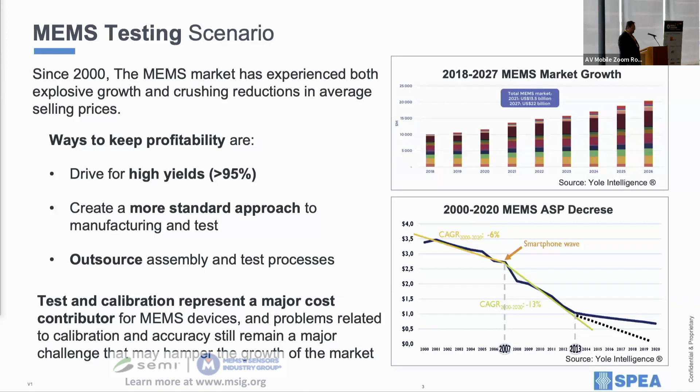We have also seen another aspect, which is the outsourcing of the testing solution. Outsourcing, because especially in the last 10 or so years, it has become very evident that keeping test capability in-house for IDMs has become very costly and inefficient.

The other challenge we have with testing for MEMS products is that there is a wide variety of MEMS devices. Those typically require application-dependent solutions for testing, which of course adds to the mix and complexity of the problem. This creates inefficiency, especially on the cost side, and affects scalability as we look forward to mass production—as we pass the stage of engineering and design and look toward mass production. This becomes a huge problem that needs to be solved if we want to keep the cost of testing down.

So how did SPEA approach the problem? We approached it with what we call the test cell. In particular here, I'm going to talk about the test cell value. The test cell is a composition of different elements.

The first one is the tester. The tester is the unit used to provide electrical stimulation for the MEMS—whether it's a pressure sensor, inertial sensor, it doesn't matter—you need some electrical stimulation for the interface. We designed a tester that can be used for any type of MEMS on the market, which is why we call this solution standard—it never has to change.

The second portion of the test cell is the pick and place. If you think about passing the stage of engineering and starting to approach mass production, you need a way to test multiple devices in parallel at the same time.

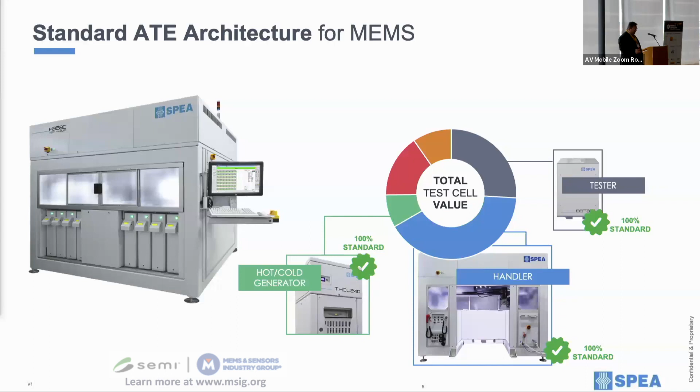There are two things that are not standard and are basically application dependent. The first one is the stimuli. The one you see on the top, depending on if you have a pressure sensor to be tested, an inertial sensor, a magnetic sensor, depending on the nature of the sensor, this unit has to be application dependent. And then the second are the sockets, obviously, because the packaging with which these MEMS come is very different, and each one requires its own application, its own sockets. So with the exception of the two units I showed you on the top, everything else is standard.

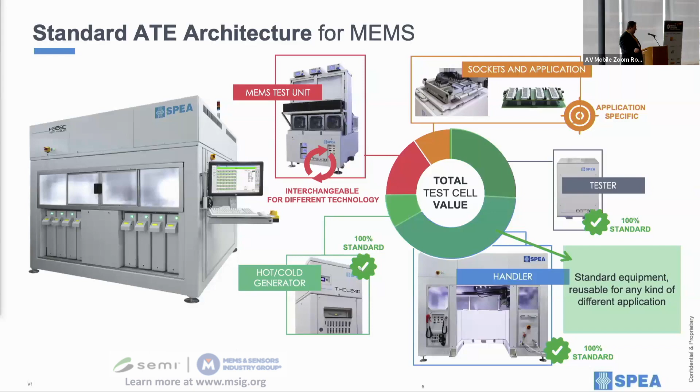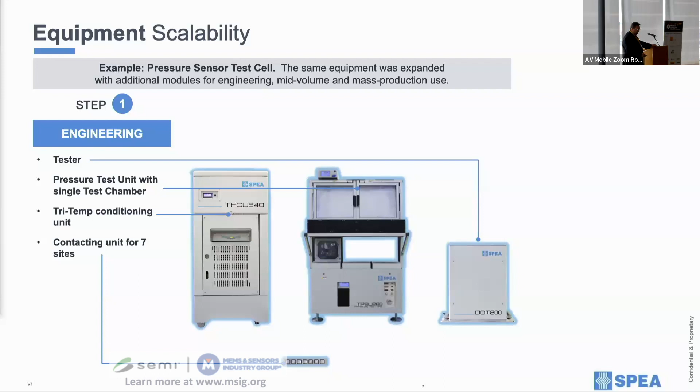So the design we chose for this kind of stimuli is such that the integration into our equipment becomes very simple. So, for example, if we think about the first stage of MEMS development, where you don't have a huge amount of volume to be tested, but you have the need to test the components, all you need out of the test cell I described before is the tester, and the thermal conditioning unit, if you need to test over temperature. And then, of course, you need the stimuli. Now, the stimuli I'm showing here is exactly the same stimuli that tomorrow will fit into the pick-and-place handler, hence the scalability. So for engineering solutions, with a simple small investment, you can address the testing need for this kind of sensor.

Then when phase 2 comes, when your volume starts to pick up and you have the need to test more and more components, not quite yet at volume scale, but enough to require some sort of automation, you can wrap around the stimuli we had before, wrap around the pick and place handler, and introduce also the testing sockets. So now, instead of testing manually a few units at a time, 1, 2, 7, now you have the ability to test 49 of them at a time. The pick and place can pick 49 components at a time from the tray, move them into the sockets, test them all together, and then sort them out as they come out. So now the volume starts to pick up. But let's just say this is not enough and your volume increases even more.

That's when the third step comes. In this particular case, what you see represented here is an example of pressure sensor stimuli. In the previous slide, there was only one pressure chamber in the stimuli, but the stimuli can be equipped with 3 pressure chambers.

For example, if you have to perform tests on a pressure sensor at different temperatures and different pressure points, you can set each of the three chambers at a different temperature. The device can move from chamber 1 to chamber 2 to chamber 3, and be tested at different temperatures and pressure points. The characterization curve of the device can be extracted, and then you can calibrate your sensor before you ship to your customer. Now, in this case, you have 2 or 3 testing chambers.

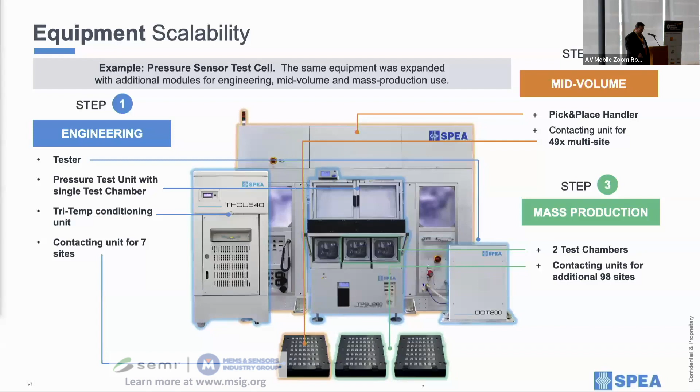The number of sites increases. It can be 49 by 1, 49 by 2, or 49 by 3, depending on the number of chambers that you have. So that's the concept of the scalability of the machine.

So I want to give you briefly 3 case studies: one for inertial sensor, one on the pressure sensor, and one on the magnetic sensor. Those are some insights on how the stimuli works, more than the pick and place or everything else.

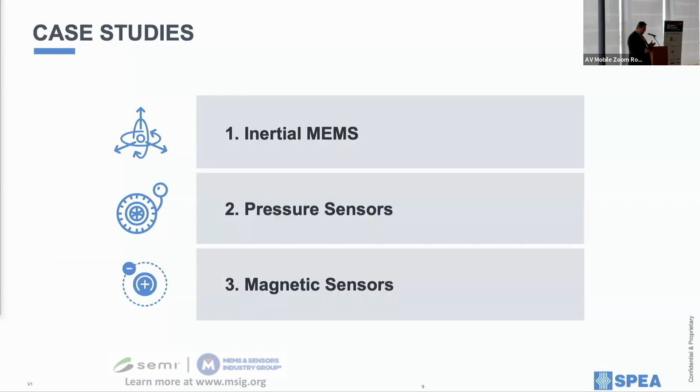With the 2 rate tables, we can reach a parallelism of 140 devices in parallel, so we can test 140 sensors at once. We can use the double rate table in a single handler, so 2 of them can fit inside the handler, and the same setup is suitable for gyro and accelerometer.

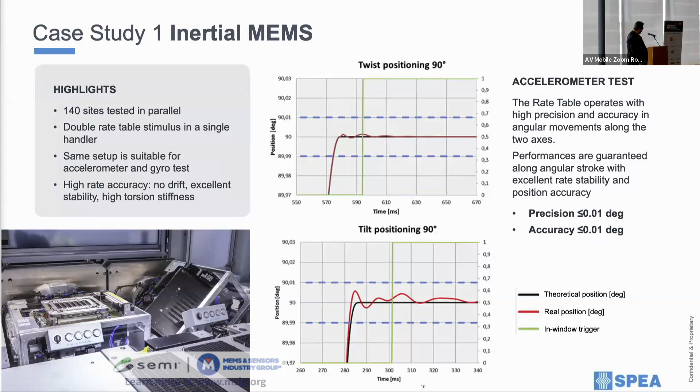You can see that the precision and accuracy of this motor is very high: 0.01 degree position accuracy on the accelerometer, and 0.1 degrees per second accuracy on the gyro.

So how do you test an accelerometer? For those of you who don't know, the accelerometer has 3 axes, and you can see here all the 6 combinations you need to test to apply positive 1G and negative 1G on each of the 3 axes of an inertial sensor. The combination of the position of the components with respect to the gravity of the earth determines the axis that you are exciting at every moment.

Whereas for the gyroscope, there are 2 ways of testing it: one is providing a sinusoidal speed profile that you see on the bottom, or the other is providing a constant speed profile.

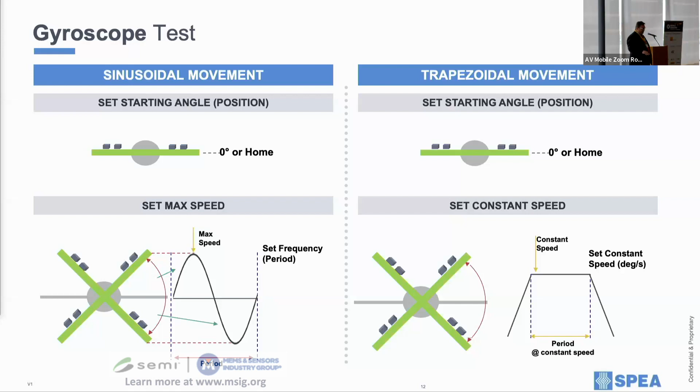We are able to provide the sinusoidal speed profile or the constant speed profile on each one of the 3 axes of the gyro as well. In this example, you can see the rate table applying a constant speed profile at 200 degrees per second. Now it's vibrating, providing a sinusoidal speed profile. The stroke, what we call the stroke, 0 to 360 degrees, is the entire motion that the rate table has.

The point here is that with this kind of equipment and all the different combinations of motion, you are capable of testing pretty much any accelerometer and gyro on the market. Today, as you saw before, we have 2 of these rate tables in each one of the pick and place handlers performing this kind of test.

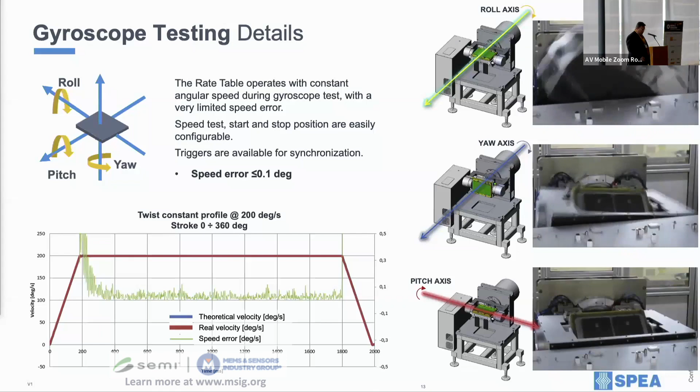Here you can see another example. The video on the left side shows a different rate table. This one is even more advanced because it not only performs the motion for the inertial sensor, but embeds the tester inside the rate table. In the previous slide, the tester was a separate unit. In this case, the tester is inside the object that is moving. With this configuration, we can test 70 devices for each rate table in parallel at the same time.

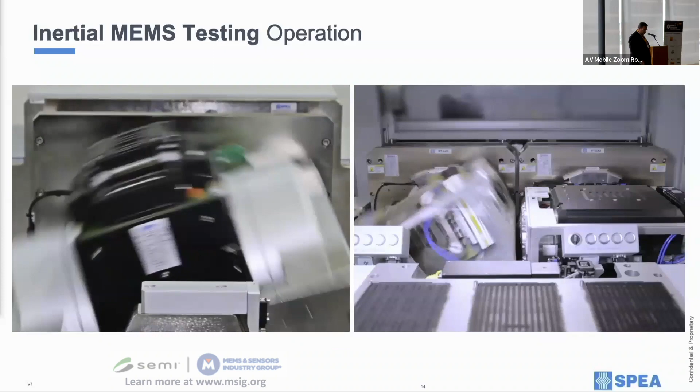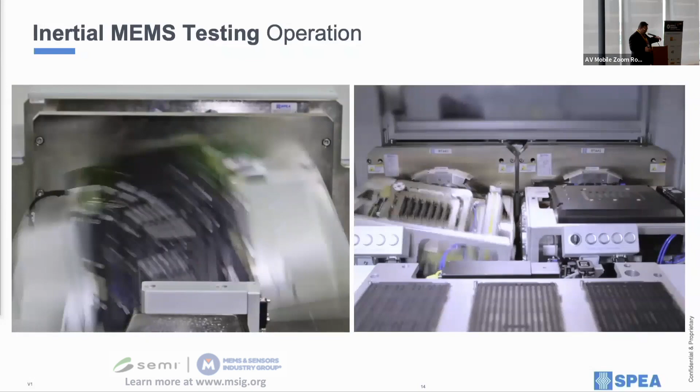On the other side of the presentation, you can see the same pick and place handler with 2 rate tables embedded in it. Here you can see an example where the two rate tables are moving independently from one another. You should imagine the pick and place head moving 49 or 70 devices at a time, depending on the configuration, loading them into the rate table, and then the rate table automatically starts and performs this test over temperature, by the way.

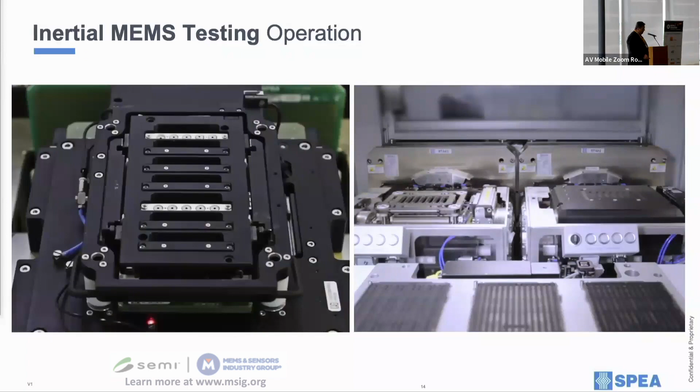This temperature span can go from minus 55 to 200 degrees.

Moving on to the second case study, which has to do with the pressure sensor. Here you can see the number of sites tested in parallel is 392. We have 3 independent pressure chambers. In this cartoon, you can see that pressure is applied on the bottom side of the chamber, controlled at the top side as well, and in that way we can perform differential tests on a differential pressure sensor.

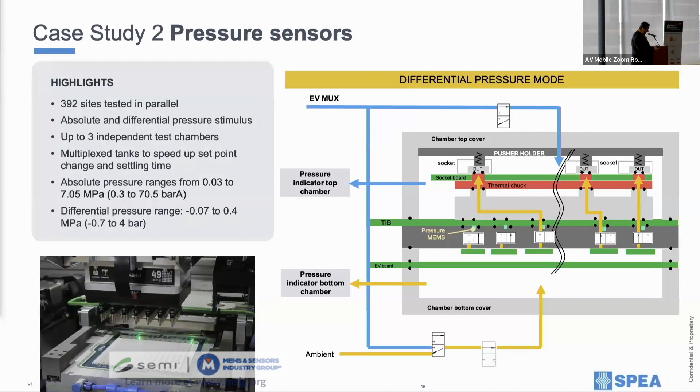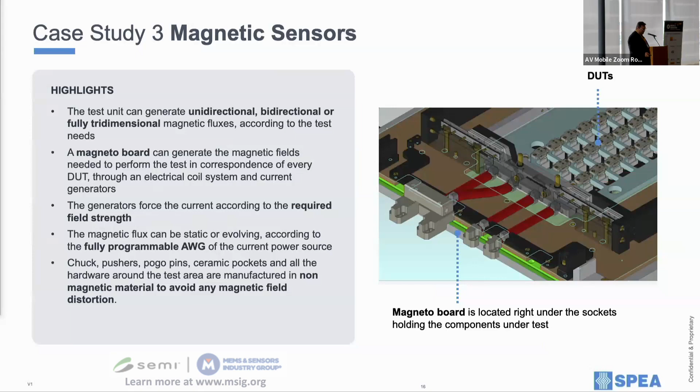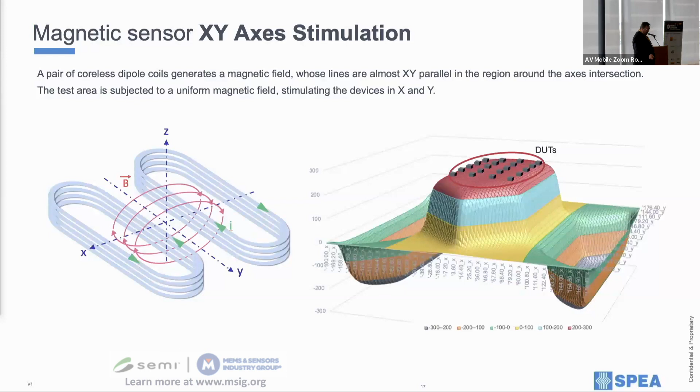The last case study I want to show is the magnetic test. We have devised a way to generate a magnetic field for a magnetic sensor on a board, on a socket board, by forcing current through loops designed on the board. The current flowing into this loop generates fields perpendicular to the direction of the current. In the area where the DUTs are placed, the direction of the field is parallel, even though the field is circular overall, it's quasi flat and quasi parallel in the device area. We are able to stimulate X and Y axis this way, and through a coreless loop designed on the board, we are also able to stimulate the Z-axis.

We can reach 600 Gauss of intensity of current on each one of the axes. In this particular example, we have 20 devices tested in parallel with that kind of field per die.

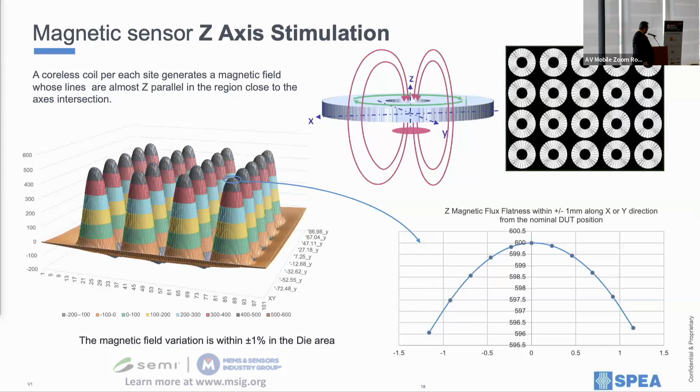In conclusion, we have been in the market for 20 years. Standardization is needed to reduce cost and increase margin for those that produce and design MEMS. SPEA has a solution that answers that question.